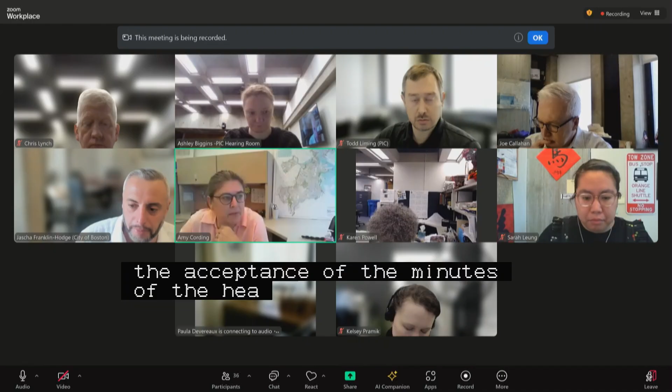So moved. On to our next item, public hearing continued, number 1, on a joint petition by the City of Boston Transportation Department and the City of Boston Public Works Department for the making of specific repairs within the following public ways in South Boston, consisting of curb realignment, roadway and sidewalk reconstruction, as well as new and relocated pedestrian ramps, traffic signal infrastructure, street lighting infrastructure, hydrants, driveway curb cuts, raised crosswalks, protected bicycle facilities, and median islands.

Old Colony Avenue, generally between Joseph Agri Street and Mitchell Street. Dorchester Street, generally between Tuckerman Street and Reverend Richard A. Burke Street. Mitchell Street, generally at Old Colony Avenue. This was new business on September 26th, with public hearings on October 10th and October 24th, as shown on a set of plans entitled City of Boston Public Works Department Engineering Division Specific Repair Plan, Old Colony Avenue and Dorchester Street, South Boston, 5 sheets dated November 6, 2024.

Would the proponents please introduce themselves, their affiliations, give us a very brief reintroduction to the project, and let us know about the changes we've all been awaiting.

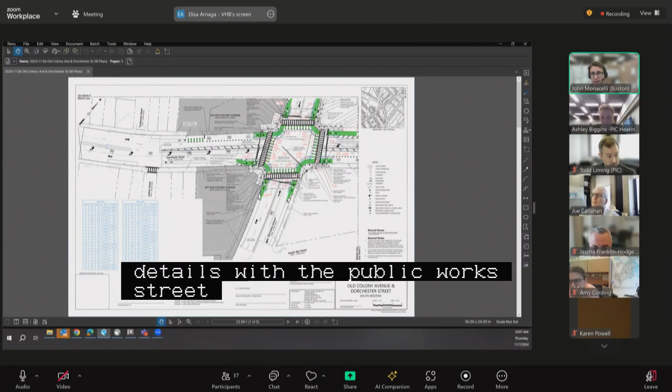Thank you, Commissioners. Good morning. John Monacelli with the Public Works Infrastructure and Design Team. I'm joined here by the consultants, Elisa is here from VHB. We did request the continuances to better coordinate with the development, specifically at 267 on that corner on the southwest of the page here. We did resolve the kind of who's doing what question, which was the biggest question mark for us. There is 1 or 2 small details with the Public Works street lighting teams to get their notes correct on these plans, and I think it relates mostly to dead-ending certain conduit runs so that there isn't live feeds while the development versus our work is happening. So we just have to get whatever the wording and the specs are from them for that. But overall, I think the biggest issues have been resolved here.

Sorry, general overview, apologies. This intersection here has a high history of crashes, mostly vehicle to vehicle, based on the multiple lanes of Old Colony and the connecting diagonal corridor of Dorchester Street. Oftentimes we have permissive left turns ending in vehicle to vehicle crashes, and subsequently jeopardizing the life and safety of non-vehicular users in the intersection as well. We have met with the community. We've been working with these developers on all 3.5 corners of the intersection, and it will support our projects moving forward on Dorchester Street specifically, and then hopefully in the future more up Old Colony as more developments trigger in. The majority of this work is to reconstruct the sidewalks, to relocate signal equipment and lighting, to improve accessibility and reclaim areas within the intersection to make those turns safer and more visible for folks.

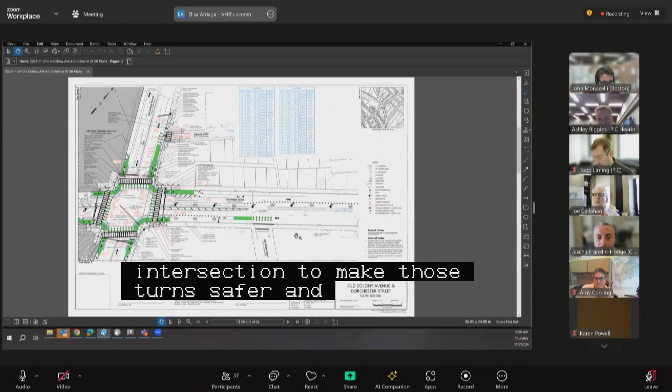Thank you very much, John. Commissioners, any questions? Hearing none, PIC staff or members of the public? We'll just ask that the street lighting comments be incorporated into the final Mylars before the project team submits those. Other than that, we have no concerns.

Seeing no raised hands for public comment, do I hear a motion to approve public hearing continued, number 1? I'll make a motion to approve a joint petition by the City of Boston Transportation Department and the City of Boston Public Works Department for the making of specific repairs in Old Colony Avenue, Dorchester Street, and Mitchell Street, as read into the record by the chair. Second. All in favor? Aye. Aye. Any opposed or abstain? So moved.

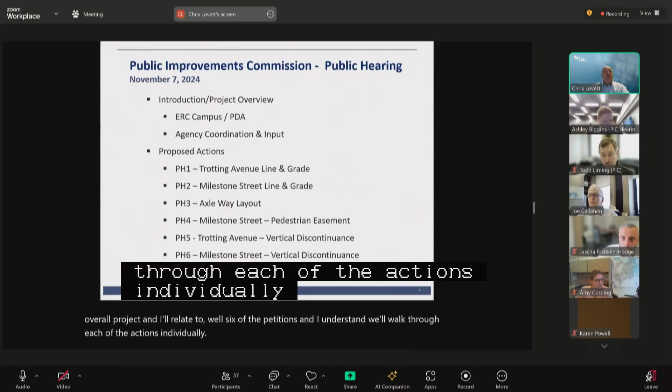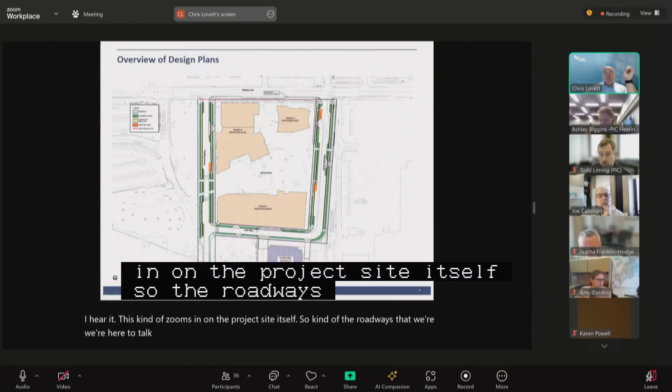Here, this kind of zooms in on the project site itself. So the roadways that we're here to talk about form this U around the development site. This development site was permitted through the PDA process by Tishman Speyer as a developer, but there's 3 buildings, a lab building, hotel and residence building, and the Harvard Conference Center as part of the project. And then there's a large greenway public open space that includes a shared use path and large walking areas and plazas.

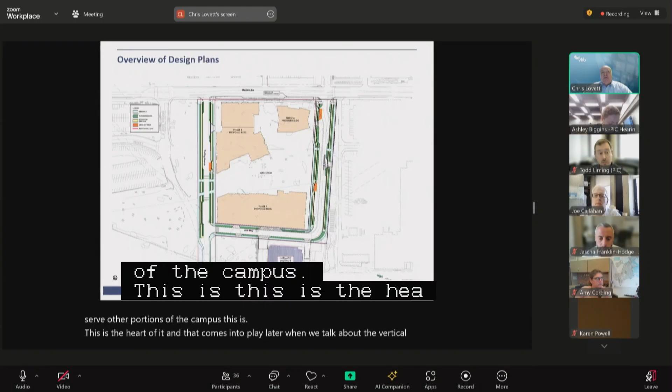And a key point on this is Harvard's district energy facility, which serves their holdings in Allston, the academic holdings. It includes the Science and Engineering Complex out to the west, the business school to the north, and there's multiple crossings of Western Ave and also crossings of North Harvard to serve other portions of the campus. But this is the heart of it, and that comes into play later when we talk about the vertical discontinuances and the amount of infrastructure and utilities running to and from this building to serve Harvard's campus.

Well, we have the big picture here. I just did want to point out a few things. The light blue on these are the sidewalks, so sidewalks on both sides of all these streets that we'll be talking to. The orange on these is either ADA drop-off areas or ADA parking spaces, and those will include an at-grade island, street level island, and then ramp up onto the sidewalks, providing better accommodations. This here on Trotting Ave is a raised crossing.

This will tie into the existing shared use path that runs west out through Rena Path in the park and then out to North Harvard Street. And then based on ongoing conversations we have with the project, this will be a raised crossing of Milestone as well. The shared use path will connect pedestrians, but also the northbound cycle track connection would be here.

As we talk through the plans, we'll also discuss modifications made here to create a perpendicular crossing as opposed to an apex ramp. We've made adjustments to make these ramps shallower, using a 3-inch transition instead of the typical 6 or 7-inch, so this will be a 4% ramp instead of an 8% ramp.

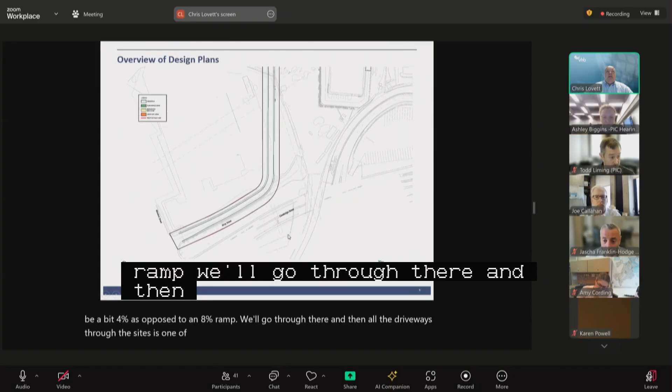Then all of the driveways through the sites - there's one at the hotel, one for access into parking for the lab and the whole site. The parking is underneath the buildings. This is loading for the lab, and this is loading for the conference center. All of those crossings will have a City of Boston driveway concrete apron, and all the pedestrian and bike crossings will be at grade.

Extending to the south, this piece here is interim Trotting Avenue. Long term, this will connect to Cambridge Street. In the short term, this will be maintained as a driveway that goes out to Windom Street, connecting into the existing Olney Street, and then following that connection out to Windom.

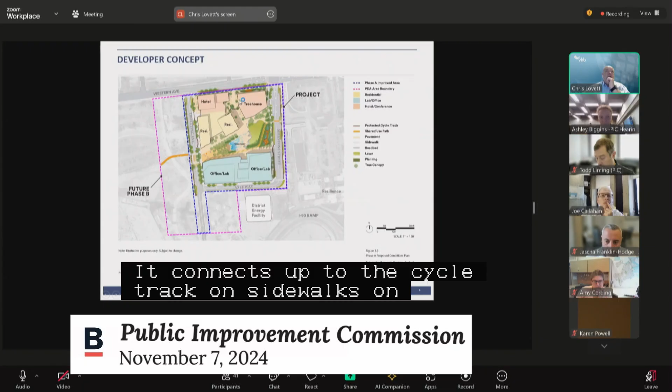This also shows that the conference center is pushed off the road a bit compared to the other buildings, and the office labs are set back a little as well.

I want to thank the Boston team through this process. It's been a long process, but a good one, and we've made changes to the plans along the way that I think have led to a better design and incorporated a lot of input that the city has had in advancing the project.

So we would like to jump into the actual petition now. The public hearing for petition 1 had opened, and this is for the line and grade approval for Trotting Avenue as a public way.

Again, we talked a little about this, but the roadway will have, on each side of the street, an 8-foot sidewalk and a 5-foot cycle track. In between, there will be hardscape areas, furnishing zones, and some bump-outs along the corridor to provide either planting or additional hardscape space.

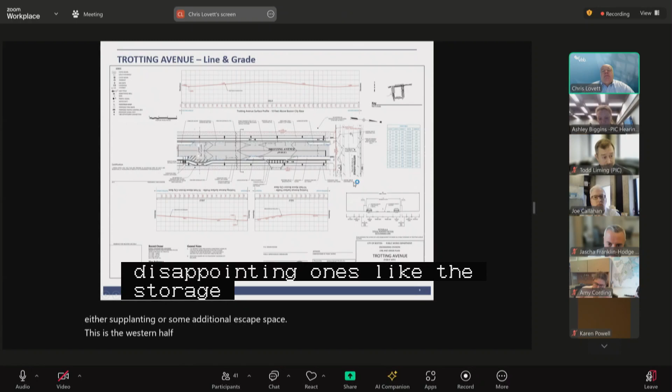This is the Western Ave connection. Western Ave improvements are part of the Tishman Speyer development project. They are actively working with the city now, and recently the 75% plans have been submitted. My understanding is their intention is to come before this board, this commission, once they have comments from the 75% plan review, and they're hoping that will happen within the next couple of months.

These show a coordination of the connection to Western Ave and the sidewalk-level cycle accommodations as well.

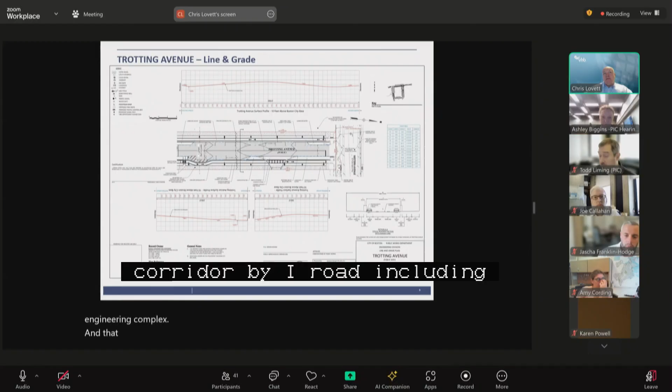This also shows the lighting. We've worked with the City of Boston Lighting Department. This is consistent with the overall Allston lighting plans carried through the Western Ave corridor by Harvard, including the Science and Engineering Complex, which includes a tighter spacing with a mix of higher and lower levels to focus on pedestrian-level lighting and make sure that's accommodating.

This here is the accessible drop-off spot. It aligns with the entry to the residential building on this corner, and the greenway sits here, providing good proximity to both the greenway and the residential building.

And then here you can see the start of the raised crossing, connecting out to the shared use path. This will be the future Science Drive longer term, but the bike shared use path will continue out to the west through the science complex and into Rita Path.

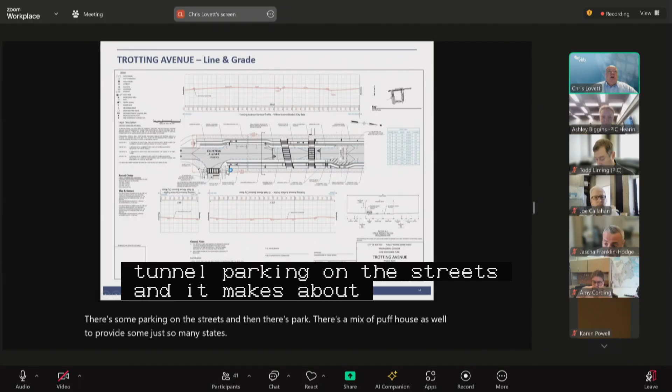And this brings us down. There's some parking on the streets, and then there's a mix of bump outs as well to provide some additional landscape.

This here is the crossing of Axel Way, and as I mentioned earlier, one of the things that were discussed was we had looked at trying to make an at-grade crossing for the sidewalks. There was some challenge, but we were able to make accommodations so that this is just a 4% drop transition through here.

Tying back in across to the south side of Axel. And then at the end here, there is room for fire apparatus to make this turn.

Axel Way is just to the east here, and we'll provide accommodation to circle through the ERC campus phase 1 roadways. As part of the process, we've established that we can do that turnaround just within the public right-of-way components of the project.

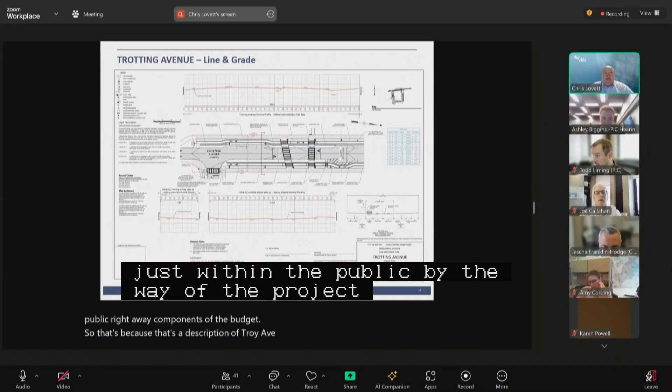So that's, I guess, a description of Trotting Ave, and I could turn it over to see if there are any questions or comments. Commissioners, questions?

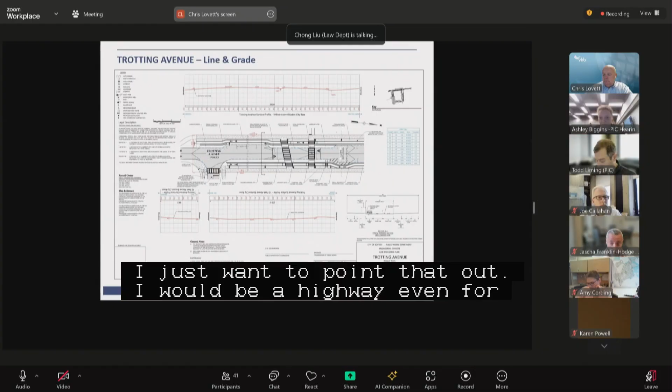I received a draft highway easement for both Trotting Ave and Milestone, which is the highway easement agreement, and the draft appears to be okay.

And I would say I have no other issues other than that PIC approves the easement drawing. So I just want to put that on the record.

I really appreciate Harvard legal counsel working with me over the last couple of days with a lot of phone calls, and I appreciate that. It appears the highway easement agreement is okay. Thank you.

All right, hearing nothing else. Todd, any final words on this one?

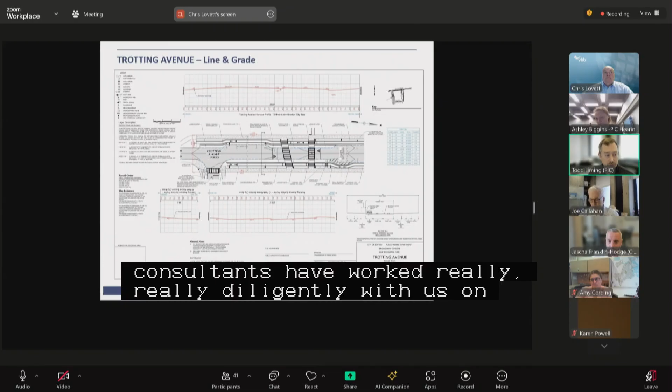No, the project team and their consultants have worked really, really diligently with us on this entire project, and it's been kind of a long road to get here. So it's worth mentioning, I just really appreciate all of the cooperation and coordination that they've gone through.

They've done a great job, but we're all set. All right, yeah, sharing that appreciation as well.

Do I hear a motion to approve public hearing number 1? I'll make a motion to approve a petition by the President and Fellows of Harvard College for the line and grade approval of Trotting Ave as read into the record by the chair.

Second. All in favor? Aye. Any opposed or abstain? So moved.

On to public hearing number 2, on a petition by the President and Fellows of Harvard College for the line and grade approval and the acceptance of a highway easement for a new public way in Brighton to be known as Milestone Street, located generally west of Soldiers Field Road from Western Avenue to a point approximately 647 feet southerly.

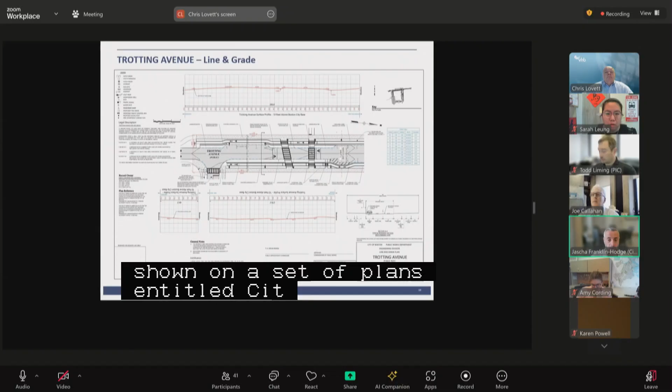This was new business on October 10th, as shown on a set of plans entitled City of Boston Public Works Department Engineering Division Line and Grade Plan, Milestone Street, Public Way, Allston, 4 sheets dated November 7th, 2024.

Would the proponents please reintroduce themselves and give us an overview of what is planned. Excuse me, we'll skip the overview since we have the high level, but please walk us through the specifics of this particular line and grade plan and any changes since your new business hearing.

Apologize, I'm going to stop the share and try to restart it. Okay, there.

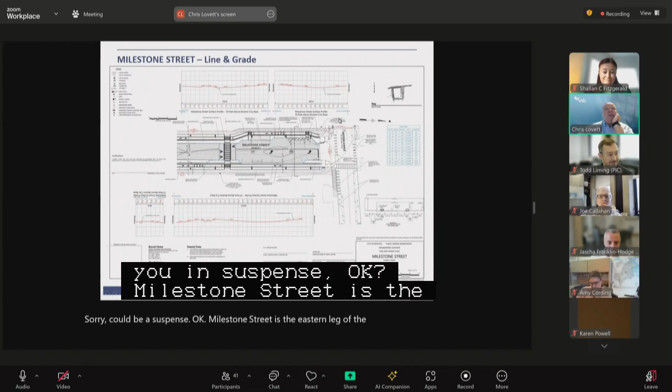Okay, Milestone Street is the eastern leg of the U. Similar conditions on Western Ave, working with the Tishman Speyer team, and they will be coming before the commission. But we've coordinated the intersection to align, including the

sidewalk level cycle track coming across the street here. On Milestone Street, the development is on the west side.

There is an ADA drop-off and an ADA parking space on this side adjacent to the conference center, the most public of the buildings. So there's connectivity to both the front and side entries of the building.

There's a small loading driveway here, again with the City of Boston concrete apron, with the sidewalk and cycle track staying at grade. Right here we have, in the initial phase, a shuttle pickup drop-off, but longer term, we plan for this to be accommodated.

This is designed to accommodate an MBTA bus stop as part of the design.

Since it's the ongoing conversations from new business and meetings in between, we've made accommodations to adjust the mid-block crossing. So again, this takes the shared use path across Milestone through the Greenway and across Milestone to the northbound cycle track and the sidewalks.

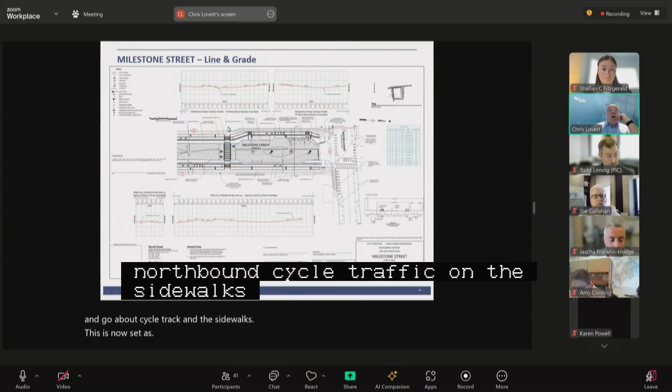This is now set as a raised crossing. So this is a 6-inch raised crossing that will accommodate this area.

Along the side, we have a 7.5-foot sidewalk that does require an easement because of the bus stop and accommodations. We have a petition for a sidewalk easement as well, but the sidewalk in total is 7.5 feet. The easement itself will be 5 feet, so 2.5 feet will be in the right of way. There are also plaza areas between this easement and the Treehouse Conference Center.

As you continue, I should also point out on Milestone Street that there is a new driveway proposed to connect into the NRI site, the former Genzyme site. Their existing access is through a driveway here, almost immediately adjacent to the proposed Milestone Street.

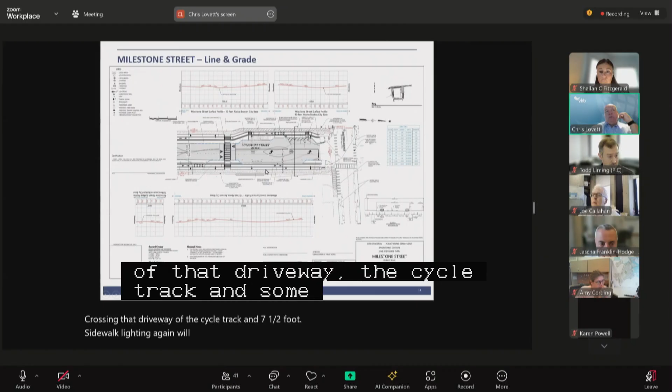So as part of the project and the West Ave Improvement Project that Tishman Speyer will be coming forward with, this curbing will be closed off and the driveway will be relocated south onto Milestone Street. Again, a raised crossing of that driveway, of the cycle track, and 7.5-foot sidewalk. Lighting will be a little tighter spacing than the typical Boston standard to accommodate more pedestrian-level lighting consistent with the Harvard Master Plan for Allston and previous projects.

And then further south on Milestone, this again is a drop-off. This is at the corner of the lab building and the south end of the Greenway. So again, good connectivity with the Greenway as well as the building, parking along Milestone.

And we've made a couple additional modifications in this new business as we've continued conversations with the city. So this has been modified. This was an apex crossing before. We've shifted it a little bit north and made it a perpendicular crossing to the south. And then we've also made some accommodations or additions in terms of pavement markings to continue this down to the driveway.

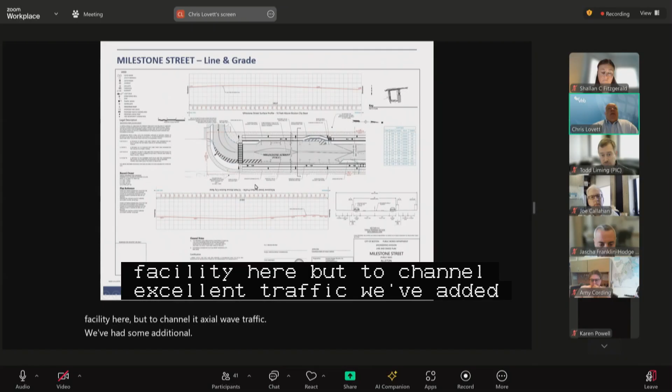This is the district energy facility here. To channel the Axle Way traffic, we've added some additional roadway striping in that area. So that is Milestone Street. And again, similar to Trotting, we will have a connection through Axle Way, a private way. We do have the ability to turn the fire apparatus within the Milestone right of way within the curbing.

Thank you very much, Chris. Do you have, so first of all, thank you for the adjustments here. I think this was very responsive to the comments we had at the last meeting, so I appreciate that.

One of the things that came up was sight lines going around this curve, and I appreciate that the team shared a sightline diagram with us. Would you be open to, if you have it handy, pulling that up so we can put that on the record and in the recording? Yes, let me figure out how to do that. If not, Todd, I think, has it handy and could pull it up. Let me just slide it over.

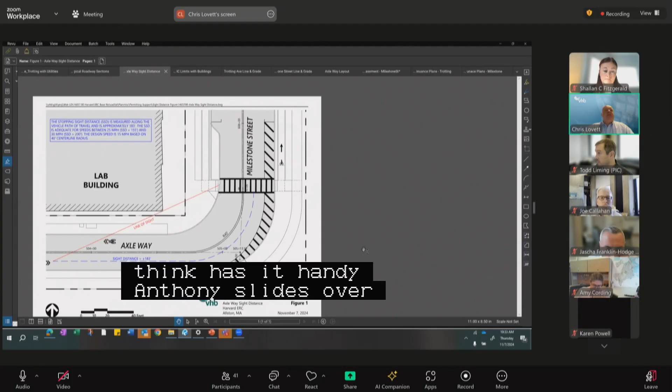So this is the sight distance diagram here. The lab building does sit back on this corner. There's an overhang about 25 feet up that will come out further, but that's outside of the sight line. So this provides about 183 feet of stopping distance through the line of sight to any pedestrian crossing. That line of sight distance would accommodate something in the range of 25 to 30 miles an hour, and this would be based on the roadway geometry and the 40-foot centerline radius, a 15-mile-an-hour speed zone design speed.

Excellent, thank you. And yeah, appreciate the clarification about the overhang. Just one question related to this while you have it up: if you look at this space that sits underneath the overhang and just outside of it, at the apex of that corner, are there any anticipated elements that would exist there on the sidewalk, fencing, structures that might impede those sightlines, or is it anticipated that that whole area will be left clear?

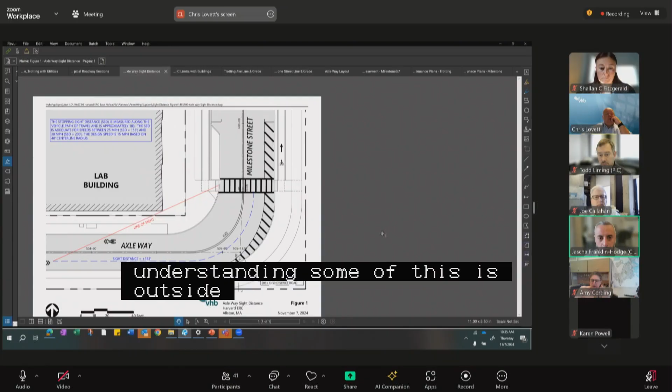It's anticipated to be left clear. We will definitely check that and make sure that no obstructions are placed within that distance. Yeah, that would be great to confirm. Understanding some of this is outside the public right of way, but obviously keeping that area clear is essential for the safe functioning of the public right of way. So we would appreciate clarity, a confirmation on that.

Commissioners, questions, comments?

All right, hearing none from PIC staff or members of the public. John Monticelli, go right ahead, sir.

Just a question, and this may or may not be available right now, but could we see the auto-turn swept paths for some of those more predictable vehicles? I appreciate you running through the sight distance and the design elements here, talking about the space that's hatched out for reservation for maneuverability. I am a little concerned about people cutting the corner, less so in larger vehicles, more so in the smaller ones. I'm thinking of areas of South Boston and industrial areas that are filling in and getting more activity and pedestrian traffic. I'm wondering if there's a way to keep folks on the side of the double yellow that they're supposed to be on.

I apologize, I don't have those turning templates handy, but we can definitely take a look at that and review it. Well, thank you so much.

Todd, anything else? I think we're all set. I know Chung was working with the project on the sidewalk easement for this one also, and they're in a similar place with that.

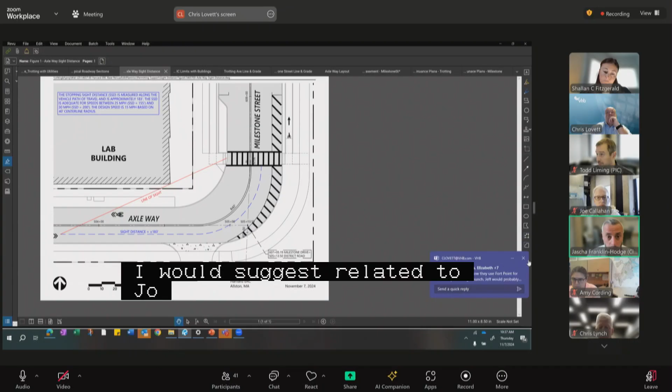So what I would suggest, related to John's comments, is that since any changes resulting from that review of the swept path analysis would likely be through traffic control devices or striping changes rather than physical permanent roadway design changes, we move ahead with this agenda item, but take it as a follow-up to sit with John to review those things. If any adjustments are made, the final plans would be updated to reflect those. Is that amenable to the proponents?

Yes. All right, excellent. Seeing no other comments or raised hands, do I hear a motion to approve public hearing number 2? I'll make a motion to approve a petition by President and Fellows of Harvard College for the line and grade approval of Milestone Street as read into the record by the chair, contingent on the result of the corner treatment through BTD. Second.

All in favor? Aye. Aye. Any opposed or abstain? So moved. On to public hearing number 3, on a petition by the President and Fellows of Harvard College for

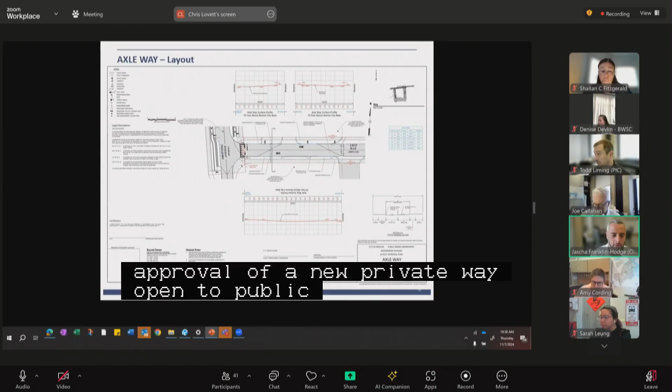the layout approval of a new private way open to public travel in Brighton, to be known as Axle Way, located between the southerly terminus of Trotting Avenue and the southerly terminus of Milestone Street. This was new business on October 10th, as shown on a set of plans entitled City of Boston Public Works Department Engineering Division Layout Approval Plan, Axle Way, Private Way Open to Public, Allston, 3 sheets dated November 7th, 2024. Would the proponents please reintroduce themselves, their affiliations, and walk us through any changes to these plans since your new business hearing?

Chris Sullivan again with BHB. Axle Way is intended to be laid out as a private way connecting Trotting Ave and Milestone Street. Axle Way is more of a service road for the ERC, the east-west roads, but it does connect to and serves the parking access for parking underneath the Phase 1 buildings. There's also loading on the north side for the lab buildings, and on the south side there are driveways around the distributed energy facility.

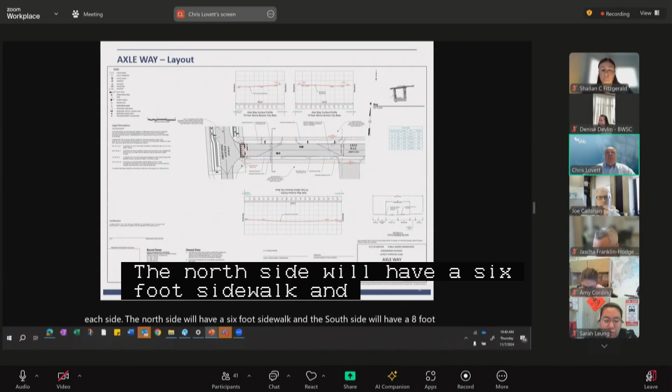And that's Axle Way. Thank you very much. Commissioners, questions, comments?

Seeing none, PIC staff or members of the public? I see none. All right, do I hear a motion to approve public hearing number 3?

I'll make a motion to approve a petition by the President and Fellows of Harvard College for the layout and approval of Axle Way as read into the record by the chair. Second. All in favor? Aye. Aye. Aye. Aye. Any opposed or abstain? So moved.

On to public hearing number 4, on a petition by the President and Fellows of Harvard College for the acceptance of a pedestrian easement adjacent to Milestone Street, public way, Brighton, located on its westerly side south of Western Avenue. This was new business on October 10th, as shown on a plan entitled City of Boston Public Works Department Engineering Division Pedestrian Easement Plan, Milestone Street, Allston, one sheet dated August 2024.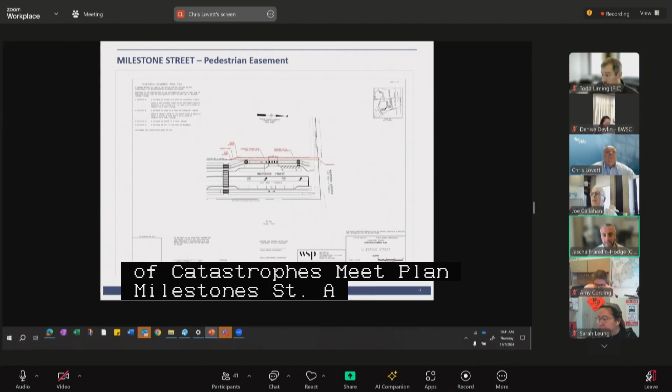Would the proponents please reintroduce themselves and give us any updates on this proposal since your new business hearing? Chris Lovett with VHB on behalf of Harvard-Allston Land Company. There have been no changes with the pedestrian easement. This remains a proposed 5.5-foot wide easement, and that combined with the sidewalk within the right-of-way will be a 7.5-foot sidewalk, and then behind this is also plaza area, offset from the Treehouse building, Conference Center building.

Commissioners, questions, comments? All right. PIC staff, members of the public? I believe Chong has commentary on this.

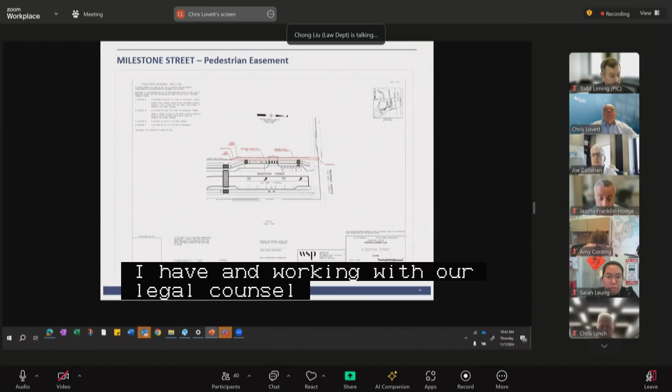Yeah, hi. My name is Chong Liu, and I'm the legal counsel for the Public Improvement Commission. I have been working with Harvard and its legal counsel to finalize the pedestrian easement. I have no major concerns about that, and thank you.

All right. Todd, any other comments? No, I think we're all set on this. Thank you. All right. Do I hear a motion to approve public hearing number 4?

Make a motion to approve a petition by the President and Fellows of Harvard College for the acceptance of a pedestrian easement in Milestone Street as read into the record by the chair. Second. All in favor? Aye. Aye. Any opposed or abstain? So moved.

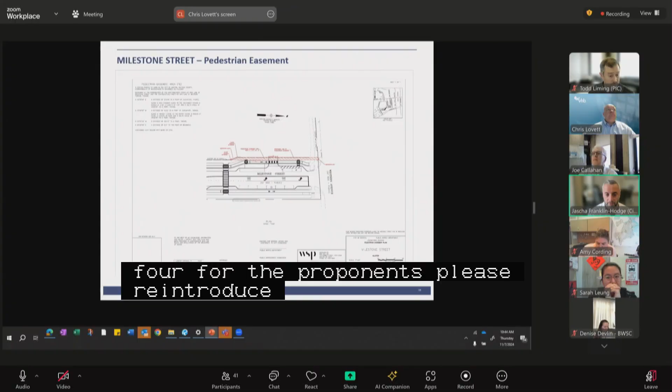Would the proponents please reintroduce themselves and give us an update on the vertical discontinuance that was first discussed at the new business hearing, and also provide a reminder for the record on why we are considering vertical discontinuances in this newly approved public way. Chris Lovett with VHB on behalf of Harvard-Allston Land Company.

This proposed vertical discontinuance—at the beginning of the project introduction, we had pointed out the location of Harvard's district energy facilities serving their Allston Holdings on the southern end of the project site. That building, that facility has a lot of infrastructure coming out of it: chill water supply and return, hot water supply and return, communications, and electrical, primary electrical feeds going out to the buildings, the different campuses within Allston serving the site.

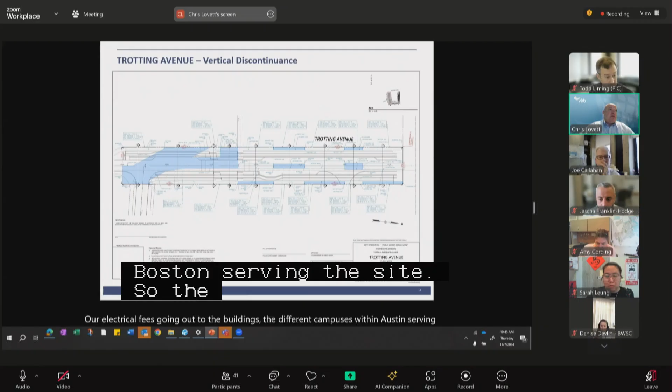So there's a large amount of Harvard private infrastructure serving their properties, and there's the business school across the street, but in particular the science and engineering complex and ongoing studies and research there—the need to keep those buildings active means all of these utilities are important in terms of maintaining resiliency and reliability. So the proposal for the vertical discontinuances is to protect those utilities and corridors and maintain that service to those buildings, and also provide access to those utilities.

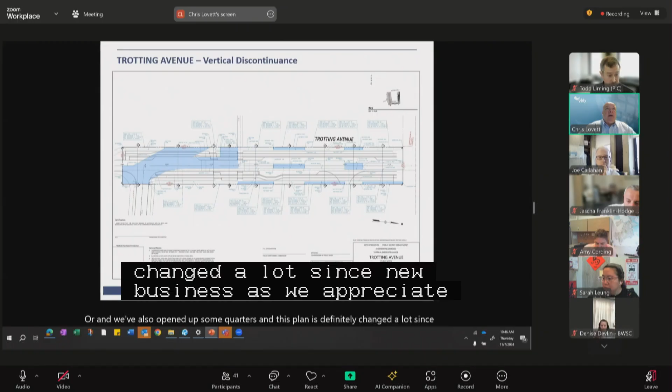And then we work with the city around where needed, easements across it, and we've also opened up some corridors. This plan has definitely changed a lot since new business, and we appreciate the efforts working with the city to develop a plan that can document the limits of it, and also provide open areas for the city as well.

So when we came before this group last time, in particular this area I think was all blue—this is the future Science Drive. There's infrastructure that runs all the way out here. This is where the Science and Engineering Complex runs out, and this runs out to the Science and Engineering Complex. And there's future stuff out here as well. So all of that area south of Science Drive had been blue.

We've worked with the city and with Harvard to try to carve out some additional areas for that. I do want to point out that the solid blue shows up very well on this. In between each of these solid blues is a striped area as well, and what these represent are different elevations with the top of the vertical discontinuance.

The bottom remains -100 for all of them, but the top varies so that we make sure we're below the roadway grades, with a little bit of cushion below the roadway grades, but not too deep that we're getting into the utility. So we're trying to work with both the longitudinal grades of the road and the crown of the road.

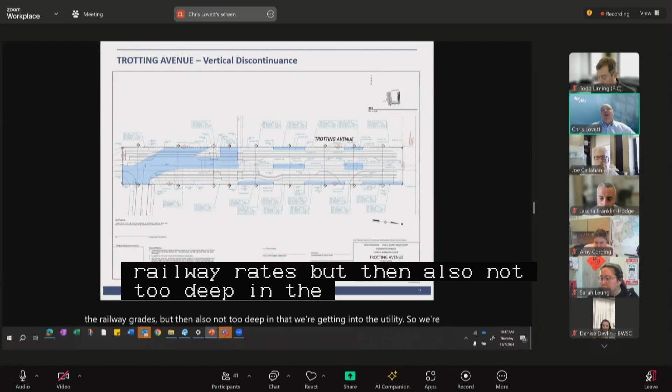It does lead to us opening up, breaking it into many segments to effectively capture the volume of the vertical discontinuance.

In working with the city, we've also added sections to the plans. The blue would indicate where Harvard is requesting the vertical discontinuance, and the white areas within the right-of-way would be the areas that remain open.

This is in addition to what was presented at new business, and also provides additional corridors for the city to work through this and provide opportunity for future utilities. So that is the vertical discontinuance for Trotting Avenue.

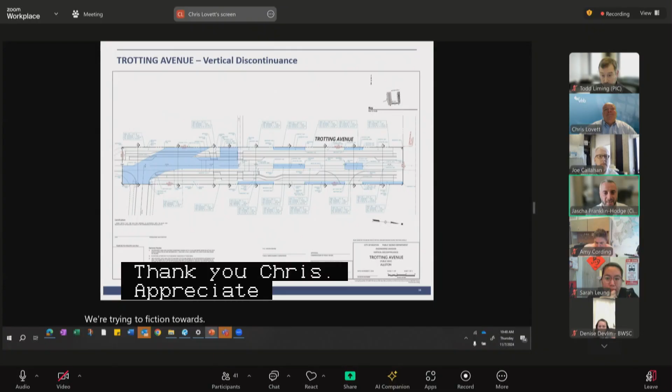Thank you, Chris. Appreciate that walkthrough. Yes, this has been probably the most complex and challenging part of this project relating to the development of this plan, so I appreciate the work that's gone into it, and the dialogue that's happened with the city team on this.

Commissioners, questions, comments? Oh yes, I have a few comments. Thank you. So we ask that PIC doesn't record the vertical discontinuance until Public Utility BWSC obtains a satisfactory easement for pipes within the Harvard easement.

Because we have, in the blue areas shown on the map, what we did was use our own map, and there are definitely some overlaps with BWSC utilities and the vertical discontinuance areas.

We have a slide later that lets us speak to the legal status of agreements, and we're noting that Harvard has drafted and will finalize an easement with the Boston Water and Sewer in coordination with PIC for Boston Water and Sewer Commission's infrastructure that runs through areas of vertical discontinuance. Okay, thank you.

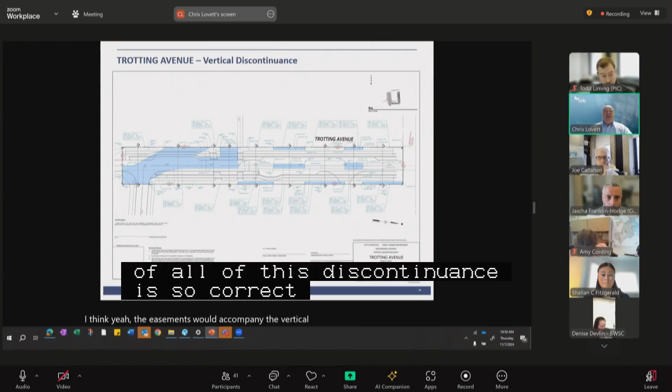And we expect that easement to be completed as part of the filing of all of these discontinuances, is that correct? Yeah, I think the easements would accompany the vertical discontinuances, which would accompany the petition for the city to accept the roads. Got it.

All right, commissioners, other questions, comments? So I will just make one for the record comment. This is a very unusual situation, and one that I think from the perspective of the city is a condition that we generally would seek to avoid as an outcome when creating a new public way.

We believe that having public ways that are, above and below ground, generally public, is an essential aspect of the city being able to manage both the roadways, the flow of traffic and pedestrians on those streets, but also to be able to provide areas that can serve the public interest broadly in terms of utility access or other elements that may need to go underground.

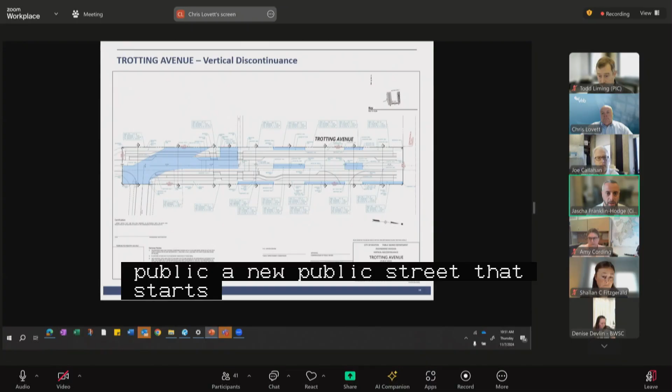As you know, creating a new public street that starts on day one with significant discontinuance underground impairs our ability to do that. I think we have made, as a city, a decision to allow this in the case of this project, given the unique circumstances associated with the district energy facility, given the very unique condition in which substantial utility infrastructure was built prior to the layout of the public way, and with some changes over the years in expectations about what might be public, what might be private.

I've heard different versions of that history, but certainly I think there was a belief on the part of some folks within the proponent team that when this original infrastructure was laid out, it would be sitting under a private way and therefore not subject to this whole process of discontinuance.

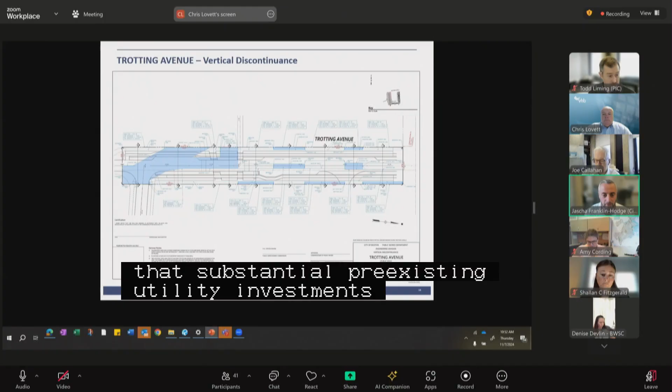So, without diving too deep into the history, the thing that is important for me to note here is that this is not a precedent for future projects. This is us working to make the best of a very unusual set of circumstances to ensure that a new street can be created, that substantial pre-existing utility investments by the proponents can be protected, and that we strike a reasonable balance to preserve the maximum utility of this public way for the city and the residents we represent for many years to come.

We certainly do not anticipate that any future public ways that are laid out will have this; it will certainly not be common practice to approve substantial predefined utility discontinuances, and in general we take the position as a city that public ways should be public above and below ground, except in a very limited set of circumstances where we grant rights to utilities to occupy relatively defined and small spaces within those rights of way. So that's my for the record spiel. We are not looking to replicate this condition in the future in other places.

With that, Todd, PIC staff, members of the public, anyone else like to add anything?

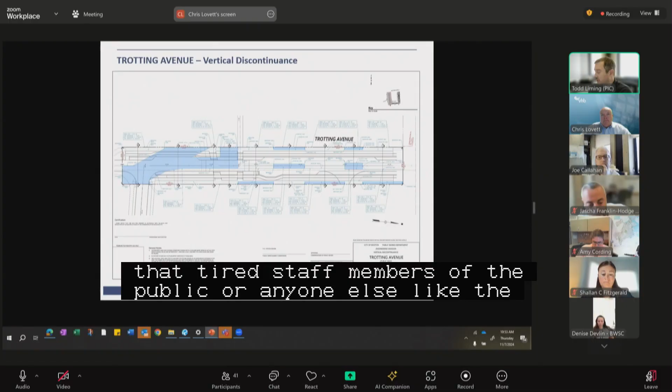I will just mention, due to the complexity of these vertical discontinuance plans, there is some refinement that the project needs to go through, adding metes and bounds descriptions and stuff like that, which maybe wasn't the most critical thing to show on these plans for this presentation, but does need to be part of what is reported eventually. Because of that, these plans are not necessarily final, and the number of sheets and the titles might be slightly updated prior to recording. Just for the record, that's something to keep in mind.

With the update based on our conversations, we did add the metes and bounds on the line work, but we do need to add the legal description per our discussion. So we'll be providing a legal description for each of the components. Yep, I know you're working on that, and I'll work with you to get those finalized before you run your final mylars. Excellent, thank you. It can be a lot of text.

All right, with that, do I hear a motion to approve public hearing number 6?

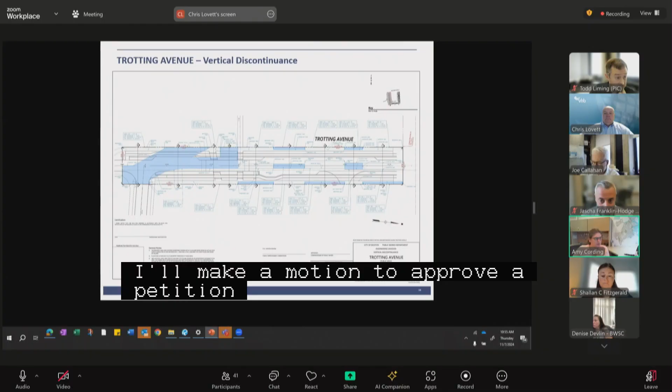I'll make a motion to approve a petition by the president and fellows of Harvard College for the vertical discontinuance of portions of Trotting Ave, as read into the record by the chair. Second. All in favor? Aye. Any opposed or abstain? So moved.

On to public hearing number 6. I may have misread that. I read the right one, you said the right number. Thank you. All right.

On to actual public hearing number 6, on a petition by the president and fellows of Harvard College for the vertical discontinuance of portions of Milestone Street, public way, Allston, located generally between Western Avenue and Axel Way, vertically beneath the grades of the roadways and sidewalks. This was new business on October 10th, as shown on a set of plans entitled City of Boston Public Works Department Engineering Division Vertical Discontinuance, Milestone Street, Public Way, Allston, 5 sheets dated November 7th, 2024.

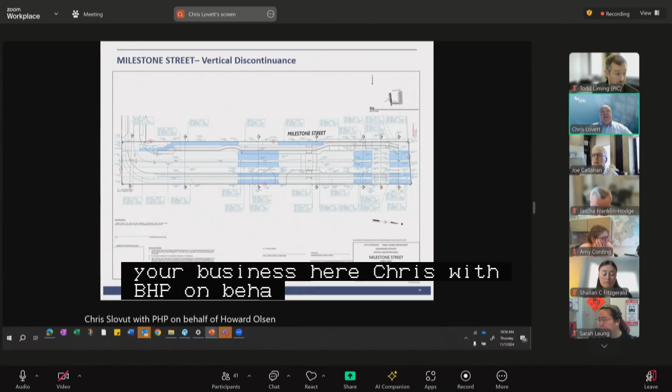Petitioners, please reintroduce yourselves and your affiliations and walk us through the details and changes since your new business hearing. Chris Lovett with VHB on behalf of Harvard Allston Land Company. This is a petition for a vertical discontinuance on Milestone Street.

As discussed in the project overview, Milestone Street is one of the utility corridors for the district energy facility that sits just south of this site. There are existing utilities running through this corridor and actually underneath Western Ave, where there already is a vertical discontinuance connecting into the business school.

Again, this plan has changed a lot since new business, working closely with PIC, and we very much appreciate the patience going through the process. We've broken this up into a number of segments, making sure that—there's some hatching that may not show great on this slide, but between the solid blue pieces, each of these are segments with the vertical delineation that is underneath the level of the pavement but over the utilities, and those are the discontinuance areas.

So there are a number of them for this particular stretch of Milestone Street. It does include the challenge of some services that come off the main lines that go up to the treehouse, as well as this site out here, where we make vertical accommodations to allow for passage over it within the corridors, particularly of the lighting and the drainage.

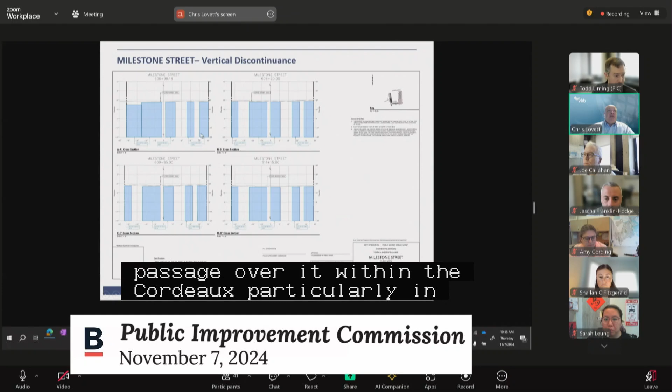So these are typical sections across each of those breakouts. There are areas where we drop it lower, for instance, for city lighting, and then there are corridors in between. Some of that is Boston Water and Sewer utilities, which currently have easements, which will go away when the roads are accepted by the city. But we will continue to work with the city to make sure this corridor is for the infrastructure.

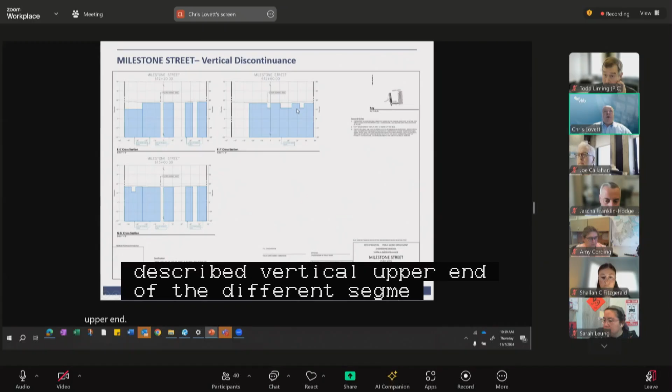This represents the kind of funky areas where we do have those service connections, so we have cutouts to allow for city infrastructure to go above these, and these go down at least 6 feet. As part of the ongoing comments, these will be broken up to provide separate areas in order to allow us to better and more clearly describe the vertical upper end of the different segments. So instead of this being one section, this is actually multiple sections through here, and that'll be updated on the plan with these sections.

Thank you very much. Commissioners, questions, comments?

I just had a comment, but I want to say thank you for responding to the comments from the last petition. We want to state for the record again, since it's a different petition, that we don't want the vertical discontinuance recorded until the public utility BWSC obtains a satisfactory easement for pipes within Harvard easement, where there's some overlap between the vertical discontinuance and our facilities. Thank you.

Thank you very much. I won't repeat my spiel, but I will again, for the record, say that this is an exceptional set of circumstances leading to us creating a set of vertical discontinuances on a newly created public way, and not one that we wish or expect to repeat in future projects, per my comments in the previous agenda item.

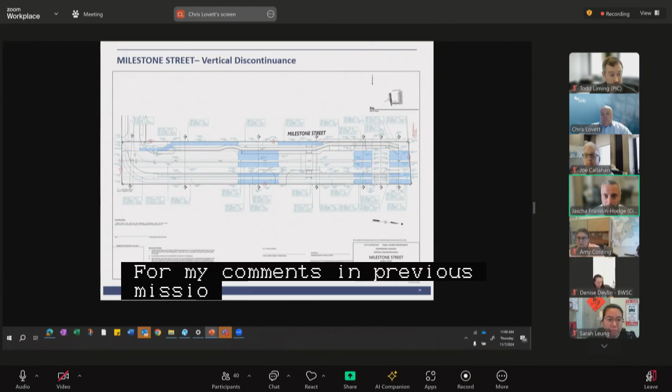Commissioners, any other comments? PIC staff or members of the public? I'll just mention the same point about the plans and descriptions — everything may be tweaked once finalized.

All right, hearing nothing else, do I hear a motion to approve actual public hearing number 6? I'll make a motion to approve a petition by the President and Fellows of Harvard College for the vertical discontinuance in portions of Milestone Street as read into the record by the chair. Second. All in favor? Aye. Aye. Any opposed or abstain? All right, so moved. We got it done.

Thank you all again from the Harvard team for working through all of these, some very challenging issues with us over the course of a number of years. So appreciate the work and the dialogue, and glad that we're able to move this ahead.

Thank you, Chief. I'd like to take this moment to thank Chair Franklin Hodge, members of the commission, the city departments, Chief Engineer Todd Liming, who was critical to us getting these plans in a position for the PIC to be able to review and approve, PIC legal counsel Chong Liu, who was also critical to us working towards making sure that all of the easements and agreements are in a good place, Boston Water and Sewer Chief Engineer John Sullivan, our stellar design team led by Chris Lovett and VHB, our council, our internal stakeholders who contributed many hours to this process.

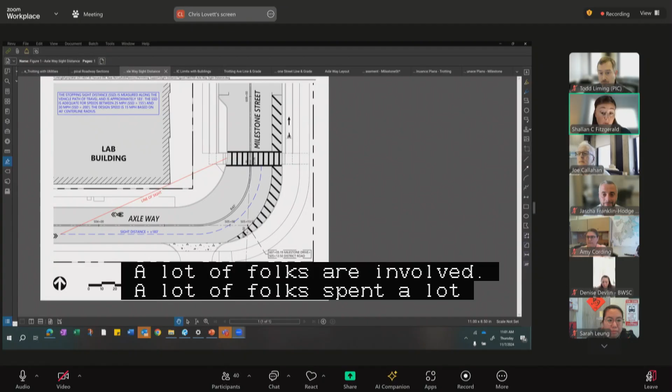A lot of folks were involved, a lot of folks spent a lot of time trying to make sure we were getting this right. So I wanted to take time to thank those folks, and we look forward to continued collaboration with the PIC for all of the future phases for Harvard's Enterprise Research Campus.

Thank you. Thank you, Shallan, very much. I appreciate the acknowledgement and the work that you put in as well to make this happen. So much appreciated.

All right, moving on to public hearing number 7, on a petition by the Trustees of Boston University for the making of specific repairs within Commonwealth Avenue, public way, Boston proper, located on its southerly side at address number 700, generally across from Granby Street, consisting of curb realignment, sidewalk reconstruction with structural soil, as well as new and relocated pedestrian ramps, specialty pavement, street lighting infrastructure, street trees, planters, landscaping, storm drain infrastructure, bike racks, and raised crosswalks.

This was new business on October 24th, as shown on a set of plans entitled City of Boston Public Works Department Engineering Division Specific Repairs Plan, 700 Commonwealth Avenue, Public Way, Boston proper, 6 sheets dated August 2024. Would the proponents please introduce themselves, their affiliations, give us a very brief reintroduction to the project, and let us know about any changes since your new business hearing.

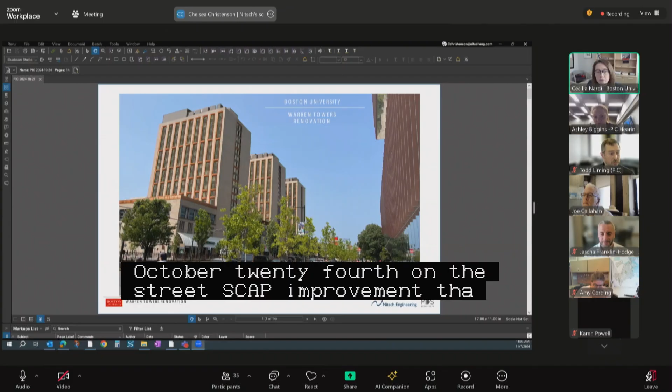Good morning, members of the commission. My name is Cecilia Nardi, and I'm the Director of Community Relations for Boston University Government and Community Affairs. We're here today to continue the presentation from October 24th on the streetscape improvements that will accompany our renovation of Warren Towers at 700 Commonwealth Avenue. These improvements will continue BU's long-standing tradition of working collaboratively with the City of Boston to enhance public spaces and the streetscape along key corridors.

A quick description of the project: constructed in 1965, Warren Towers is the largest dormitory in Boston and the second largest non-military dormitory in the US, housing 1,800 undergraduate students. The project site borders Commonwealth Avenue to the north, Cummington Mall to the south and west, and Hinsdale Mall to the east. The 18-story structure features 3 residential towers atop a 4-story podium, which includes student spaces, retail storefronts, and a parking garage.

The proposed streetscape improvements will elevate both the campus environment and the public realm along this prominent corridor. We'd like to thank all city staff for their thoughtful review and valuable comments throughout this process, and appreciate your time today. I'll now turn it over to Chelsea Christenson of Nitsch Engineering.

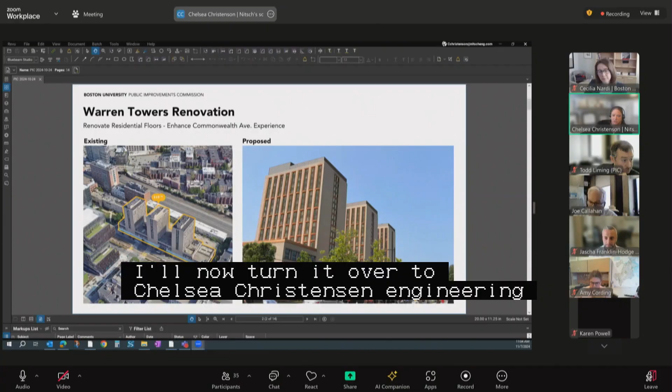Just for context, I have Warren Tower site here highlighted in red with the BU Bridge to the left, Mass Ave Bridge to the right. Thank you, Cecilia, for the introduction. Our specific repairs today include a new raised crossing at Cummington Mall and Hinsdale Mall with extended planters, new porous paver strip, approximately a 12-foot wide concrete sidewalk along the length of Warren Towers, as well as new bike racks, relocated street lighting, and new pedestrian ramps.

I did send out the updated plans to everyone. There have not been any changes since new business, but these are the specific repair plans that we have all seen. The raised crossing here at Cummington Mall, 12-foot wide pedestrian ramp with the straightened crosswalks going across Commonwealth Avenue.

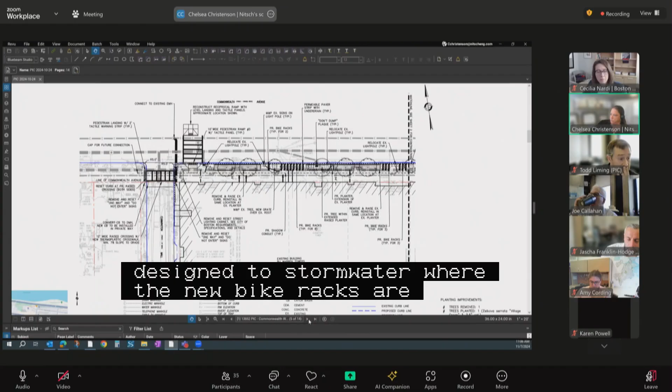Reset planters designed to accept stormwater where they can. New bike racks along the porous paver strip. Resetting the streetlights outside of the porous paver strip as requested. And

We also are relocating the bus stop that is currently located at this area here, down further to the east of Com Ave, which is the expected location of it.

With that, I will open it up to any additional questions that we may have. Commissioners, questions, comments? I'm not sure. All right, hearing none, PIC staff or members of the public? I think we're all set on this.

All right. Do I hear a motion to approve public hearing number 7? I'll make a motion to approve a petition by the trustees of Boston University for the making of specific repairs within Commonwealth Avenue as read into the record by the chair. Second. All in favor? Aye. Aye. Aye. Any opposed or abstained? So moved. Thank you very much. Thank you. Thank you all.

Thank you. All right, on to public hearing number 8 on a petition by residences at 1471 Blue Hill Limited Partnership for the making of specific repairs within the following public ways in Dorchester, consisting of curb realignment, sidewalk reconstruction, as well as new and relocated pedestrian ramps, specialty pavement, street lighting infrastructure, street trees, planters, landscaping, green stormwater infrastructure, bike racks, and driveway curb cuts. Blue Hill Avenue at address number 1471, generally north of Woodhaven Street, Culbert Street northwest of Woodhaven Street, Woodhaven Street generally at Blue Hill Avenue / Culbert Street.

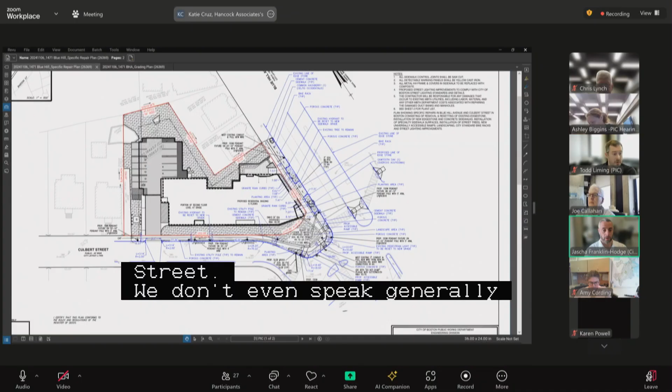This was new business on October 24th as shown on a set of plans entitled City of Boston Public Works Department Engineering Division Specific Repair Plan 1471 Blue Hill Avenue, Culbert Street, Mattapan, 2 sheets dated March 22nd, 2024, revised November 2024. The proponents please introduce themselves, their affiliations, give us a brief orientation to the project, and let us know about any changes since your new business hearing.

Good morning. I'm Katie Cruz, civil engineer with Hancock Associates, here with Scott Shaw of the proponent Lincoln Avenue Capital. The proposed project is located at the corner of Culbert Street and Blue Hill Avenue. It's also adjacent to Woodhaven Street. The project is 41 affordable housing units. The project site will include 12 parking spaces and a curb cut off of Culbert Street.

Since we last presented, we made some adjustments to the alignment of the 3 curb ramps at the corner of Blue Hill Avenue, Culbert Street, and Woodhaven Street so that they are aligned with the existing crosswalks. That adjusted the curb line a little bit to accommodate for that. We also modified the material between the curb ramps per the request of the Disabilities Commission - we've switched that to porous concrete. Other than some minor layout adjustments to accommodate the new curb line, the plans have not changed.

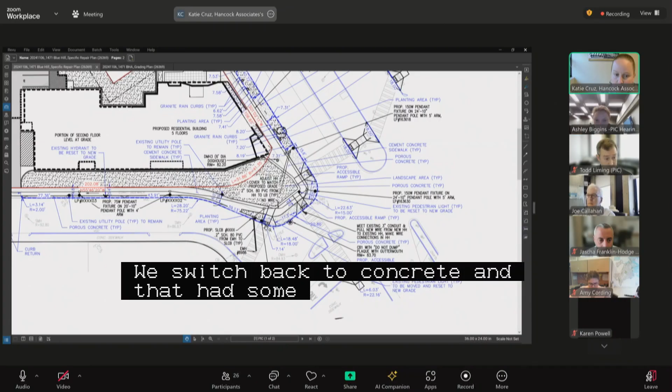All right, thank you very much. Commissioners, comments, questions? I just wanted to thank the team for incorporating our feedback about the furnishing zone and making that a more porous material. I did have a question about the width of the driveway and whether or not that could be narrowed due to the small amount of parking spaces that exist on site. In the future that could be narrowed down to 12 or 10 feet with approval from the Transportation Department.

Yes, Sarah, we did look at reducing the width of that driveway, and we elected not to for a couple of reasons. One is that we do need that width of the aisle behind the parking spaces for cars to maneuver in and out of those spaces. And then the other is that we have a loading area on the side of that driveway, and just to be able to accommodate that in two-way traffic, we felt like we needed that width of 20 feet.

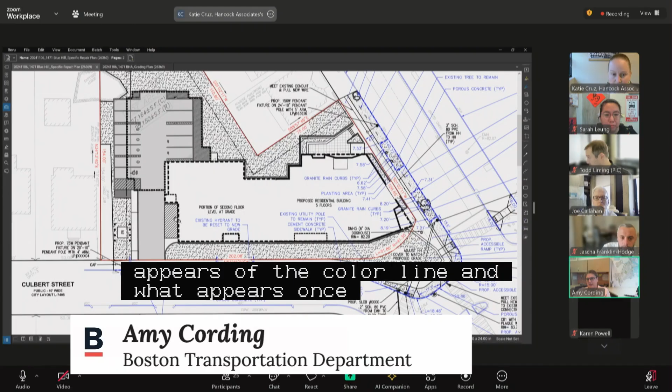Right, thank you. I guess I would just defer to Amy on that. Yeah, I think the question is, hearing the internal needs, what appears at the curb line and what appears once you're at the back of the sidewalk. If you leave the 20 feet and the things that are all in gray, can we just reduce the size of the curb cut and the pedestrian exposure to vehicles coming out of this driveway?

Understood. I think because this is a very small scale site, a small scale project, to allow for moving trucks to pull in there, as well as trash removal vehicles, having that 20-foot width makes that maneuver a lot easier to accommodate that use right off the curb cut. But we do appreciate that comment.

Was this dimension selected based on truck turning movements? Yes, it was. Great, then can you please supply those as backup for this? Yes, we can.

All right. Commissioners, other questions? PIC staff or members of the public?

I will mention that the project has gone through quite a few conversations with us specific to the pedestrian ramps and crosswalk alignments and all of that. We met with infrastructure and design consultants a few days ago regarding the crosswalks and ramps specifically. They've worked on it a lot. I don't know if any of the commission members have commentary they'd like to add regarding all of that, but thought it was worth mentioning.

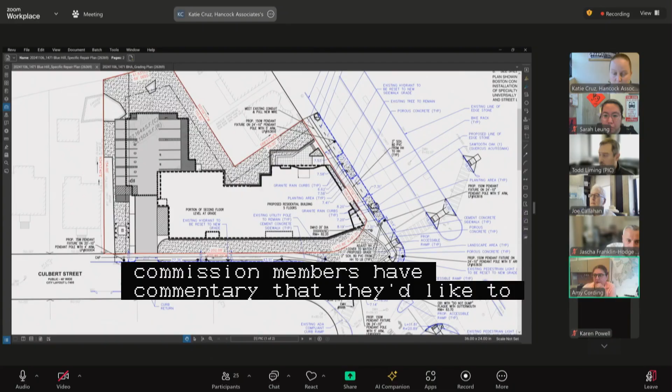No, I think the only thing I'll flag, and Todd flagged this everywhere, is that we have some other stuff happening on Blue Hill Ave, and we need to make sure that the timing and what shows up when is all well coordinated with that effort. So I know we're going to approve this, but we just want to make sure you're constantly a part of the ongoing Blue Hill Ave discussion.

Okay, I think there's a little bit of minor discussion regarding some of the ramps and the crosswalk alignment on the opposite side of Blue Hill Ave. The project team, I'm happy to continue that conversation with you, and we can tweak what's shown on these plans based on that conversation after this hearing, if that's all right with the commission.

Yep. Is that good with everyone? Concerns?

Yeah, and I'd also like to extend my appreciation for the changes that we do see here. I think aligning or resetting the curb, this is a much better shape, and the crosswalks and their ramps are looking much better in general. So just thank you to the team for your responsiveness on that.

And I'll just second Todd's comment that the far side ramp that goes from the median to the other side of Blue Hill Ave still has a weird alignment, but that's a relatively minor thing at this point. This is much improved. Indeed, thank you for that.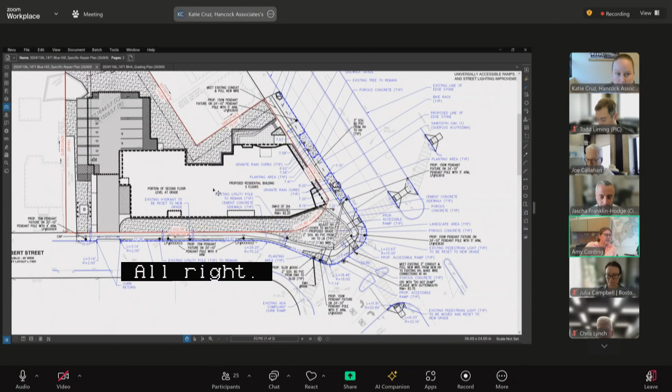All right, hearing nothing else, do I hear a motion to approve public hearing number 8? I'll make a motion to approve a petition by residences at 1471 Blue Hill Limited Partnership for the making of specific repairs in Blue Hill Ave, Culver Street, and Woodhaven Street as read into the record by the chair.

Second. All in favor? Aye. Aye. Aye. Any opposed or abstain? So moved. Thank you very much.

Thank you. Right, that concludes the public hearing section of the agenda, and on to new business, and possibly the most fun agenda item on our list today. We have new business 1, Washington Street, Winter Street, Summer Street, Franklin Street, Boston proper, specific repairs on a petition by Downtown Boston Business Improvement District. The proponents, please introduce yourselves, your affiliations, and talk to us about what you are proposing to put in Downtown Crossing.

Sure, thank you, Chief. Good morning, and thank you, Mr. Chairman, members of the Commission. I'm Michael Nichols, President of the Downtown BID, and on behalf of my colleague Kelsey Pramik and I, we're delighted to be with you today to share plans for a new set of distinctive holiday decorations for the shopping district in Downtown Crossing.

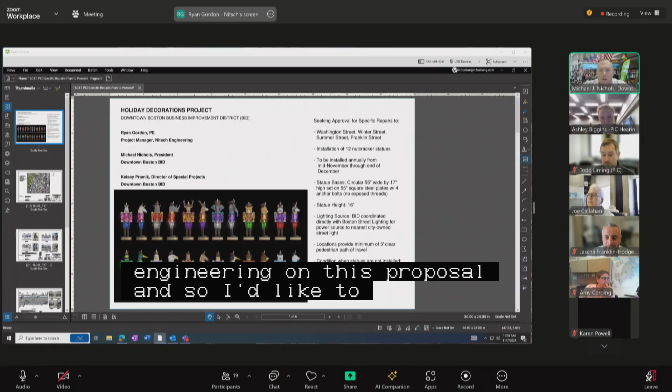Good morning to the Commission and everyone. My name is Ryan Gordon, Project Manager with Nitsch Engineering. As Michael said, we are proposing specific repairs to Washington Street, Winter Street, Summer Street, and Franklin Street for the installation of 12 statues. They are to be installed annually from mid-November through the end of December.

The statue bases are 55 inches wide by 17 inches high, set on steel plates with 4 anchor bolts. Each statue is about 16 feet tall, and the BID has been coordinating directly with Boston Street Lighting for power sources to each statue, to City of Boston Street Lights. The locations we are proposing provide a minimum of 5 feet clear pedestrian path of travel, and when the statues are not installed, there will be flat-headed anchors installed where the bolts are, so that flush sidewalk conditions are provided. So I'm going to walk through each location, and if you have any questions, please let me know.

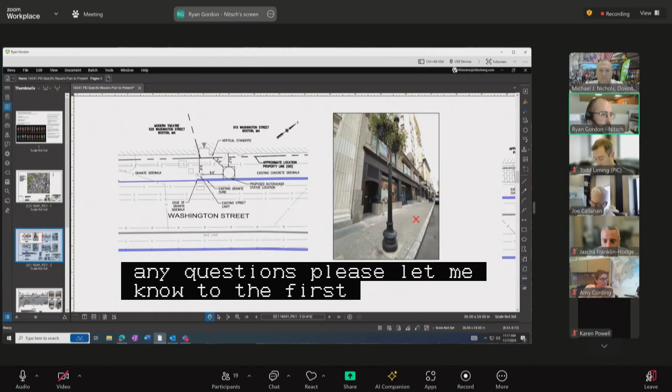The first location is next to the Modern Theater, 525 Washington Street. We have an X at each location that shows the approximate location. Each statue is set about 5 to 10 feet off of the nearest light pole. The second location is at 500 Washington Street, outside of the Winder Museum.

The third location is at 449 to 467 Washington Street, outside of the old Forever 21 and Snipes. We are using the furnishing zone as much as possible to get that statue base to not get into the pedestrian path of travel. The fourth location is on Winter Street, and Winter Street here is mainly open for pedestrian travel. The curb is flush, and most of the street is brick.

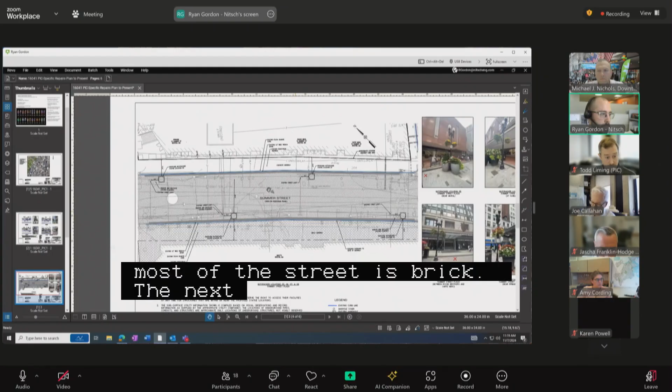The next 4 locations are spaced throughout Summer Street Plaza. You can see the 4 here. The next location is outside of 399 Washington Street, that's across from Old Navy. The next two are in Shoppers Plaza, and they're spaced apart, still providing that minimum 5 feet around. And the last location is outside of 343 Washington Street.

Just to show you again, here's an image of each of the statues, front facing and profile view. Our specific repairs plan has a detail of the base, the anchor bolt, and a rough detail of the minimum 5-foot path of travel. So I'm happy to answer any questions that you have.

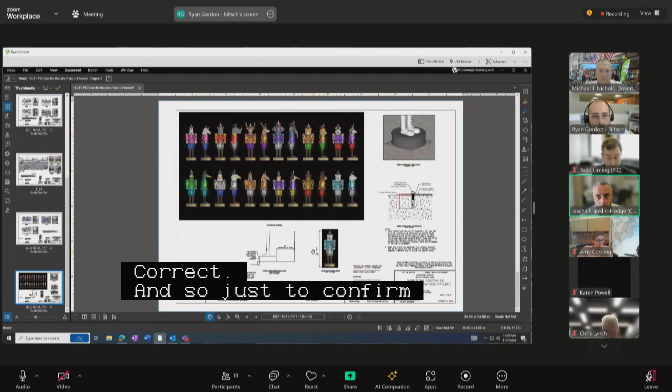Thank you very much, these are very cool to see, and very excited for 16-foot statuary downtown. Couple of questions. First, these are powered and illuminated, correct? Correct. And the power feed is coming from the city street lighting system? Correct. So just to confirm, will all of those power feeds happen underground? I will let Kelsey or Michael speak to this.

Yeah, I think in all cases, or all but perhaps the ones that are on the stage at the steps next to Millennium Tower, the other 10, it would actually emanate out of the head at the 16-foot level and reach the street light pole at that height. Got it, yeah. When your statue is that tall, you can actually just bridge to get there.

That's fair. Okay, and my understanding is that you have reviewed this plan with the City Street Lighting Division and that they have signed off on all of the details of the power arrangements, and that there is an understanding about who is responsible for wiring, for maintenance, for addressing any power supply issues that may occur while the statues are installed. Is that correct? Yes. Okay.

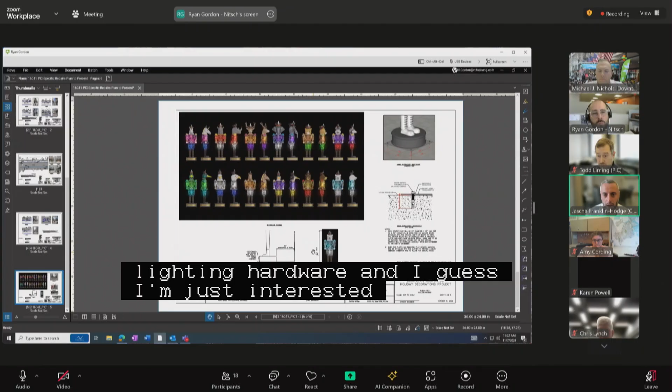Related to the street lighting aspect of this, it looks like from the details, some of these base locations are positioned over some underground infrastructure, potentially some street lighting conduit. I'm interested in hearing this group's thoughts on how we would address any maintenance issues that might arise in the future related to underground infrastructure beneath these bases, what the expectations are for how these bases can be removed or reset, and what the proponent's understanding is of who will have the responsibility for reinstallation if, for example, we need to remove a base in order to repair a conduit that's underneath.

Nitsch Engineering looked at the locations of the existing utilities in the sidewalks. We understand that utility companies, especially Boston Water and Sewer, need to maintain access to those when needed. The statues are removable because they're bolted into the ground. We didn't place any of the statues over structures, manhole covers, or anything like that - they were placed intentionally to avoid those.

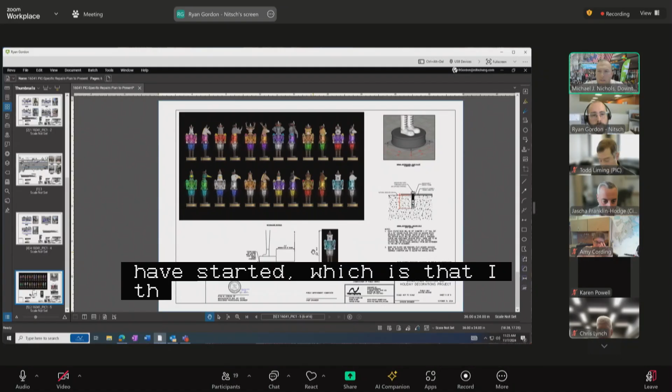The siting was selected to factor in the minimal likelihood of conflict with underground utilities. In the event there is a conflict, however, the BID would be responsible for removal and reinstallation of the sculptures as appropriate, including the bases. If a base was removed during utility construction, the responsibility for reinstalling those would be borne by the BID - entirely to be responsible by the bid. The sculptures themselves come in 3 pieces, so they are not a single fixed unit, making de-installation relatively straightforward and easy.

I appreciate that, and we can memorialize that in the LMI. The other thing I would ask is that we establish some procedures for the city to contact the BID if there's emergency utility work needed, so we have an established way to get in touch with you. We have all those protocols in place for traditional utilities, but this is something new, so we want to make sure that's close at hand.

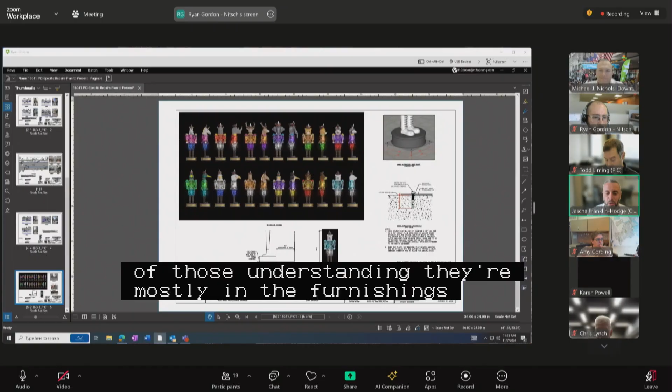My last question relates to the plates that will be permanently installed in the street and the surface treatment of those plates. The concern would be around creating slipping hazards during wet or icy conditions if there's not a sufficiently anti-slip treatment on the top surface. Understanding they're mostly in the furnishing zone - Downtown Crossing is very porous for pedestrians, and people walk through the furnishing zone regularly. Can you speak to the materials and what will be done to ensure they do not create a hazard?

Ryan may be able to speak to some of the elements, but it's our understanding that the rounded base, seen in the upper right of the image, where the feet stand, occupies the vast majority of the square footage of the metal plate underneath. So the likelihood of someone being able to step on the exposed portion is so minimal as to perhaps not be a slipping hazard. We can certainly explore treating the amount of metal that remains exposed with an appropriate slip-proof material.

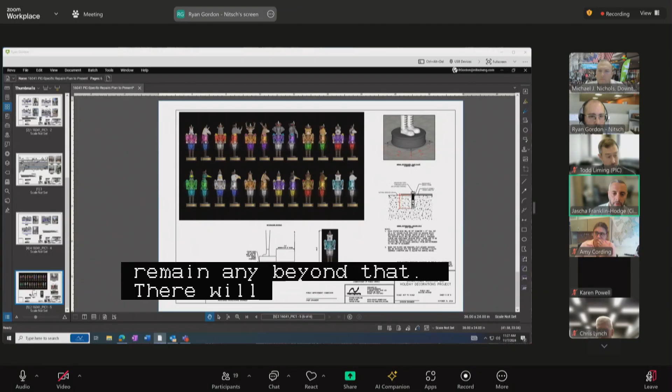Maybe I'm misunderstanding the plan, but per the detail, there's a square metal plate on which the rounded base will be installed. The concern is less about when that rounded base is installed, but whether that square metal plate is intended to remain when the statues are not installed. No - it would be removed in the other 11 months of the year. So the bolts that attach that metal plate to the sidewalk will be filled in with some kind of temporary cover flush to the sidewalk, and there will not remain any visible structure on the sidewalk when the statue is removed. Okay, got it - I think I misunderstood, I was under the impression the metal plate would remain, but that clarifies and is helpful.

It is something I would think about - we've occasionally had issues with city infrastructure where during installation or deinstallation, elements have been left in the right-of-way that proved hazardous, whereas the final condition of the plate, round base, and statue does not necessarily pose a slipping hazard. I'm not sure what the installation timeline might be, or in a circumstance where one of the statues was damaged and had to be temporarily removed, but the plate was left in place.

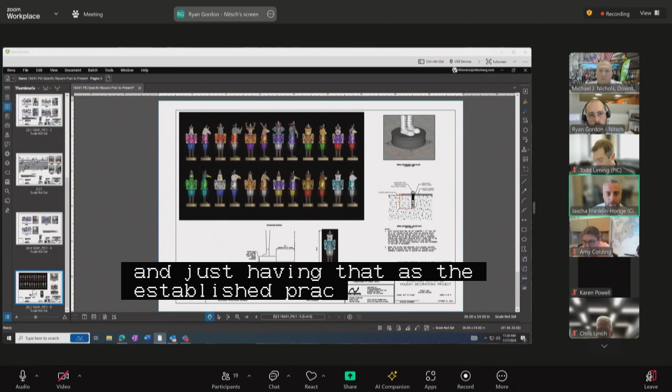So I would want to think through if there are any additional treatments or protocols we'd want to establish for how the site will be ensured safe if, for whatever reason, it's not in its fully installed condition for some period of time. That could be placing a traffic cone on it as an established practice, or some other way of making sure it's safe. We've had some issues recently with newly installed infrastructure having unfavorable conditions for pedestrians in wet weather, and I want to avoid even a temporary situation where somebody slips and falls. I don't want to prescribe a specific course of action, but would ask that for your next hearing you come with a plan you can articulate to us.

We'll commit to that, and we appreciate the prompt. Thank you. Commissioners, other questions, comments?

My computer froze up, I apologize if this was covered, but in the event there's vandalism such as graffiti, I presume you have the capability to remove it and keep the structures clean? That's right, we'll commit to that. Thank you.

We received a separate application for other winter temporary art in this location, so I think we should take a moment to make sure we're not stacking our winter art. A great problem for Downtown Crossing to have, but just making sure they're compatible.

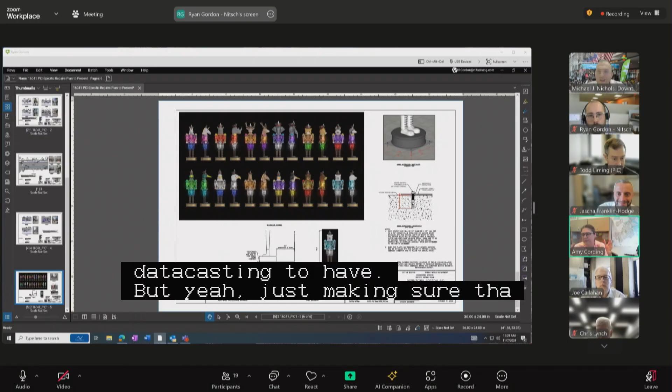Yeah, thank you, Amy, that was us as well. So as we talk about where that's going to fall, right, I just want to make sure we're well coordinated. I just wanted to flag that, so at least in terms of deinstall of these and install of subsequent winter art, that's something we would sequence to ensure there isn't direct conflict here. But we certainly commit to any aggregated review you think makes sense.

The winter art you're referring to has become a second, hopefully annual, set of installations, but the locations change each year, and we'll plan for those with an understanding that the sculptures would be coming back each year.

Commissioners, other questions, comments? PIC staff or members of the public?

I would just ask that the BID reach out to Public Works' operations team to make sure they're aware of these, and that they won't pose any issues as far as snow plowing or anything like that.

Absolutely, yeah, we had noted, to Amy's point, in the public art application, but perhaps not in this application, that the BID maintains snow removal abilities, and so if any of our infrastructure causes hardship to Public Works in that area, we would fill in the gap and be responsible for that.

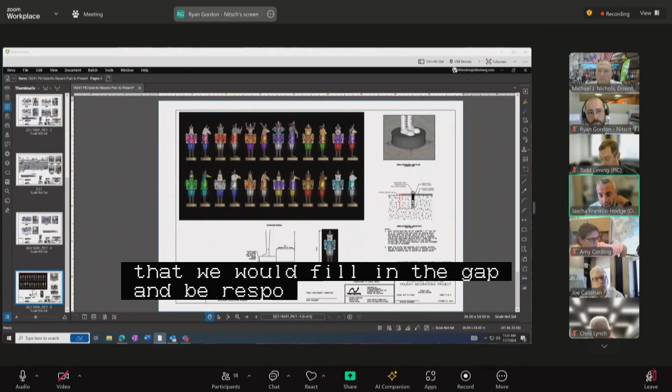So we will relay that to them. Todd, thank you. Great, I appreciate that, and Todd can provide contact information for folks.

And to Joe's point about the graffiti and other things, many issues in the public realm tend to trickle down to the Public Works operations team as a 'what do we do about this?' So just making sure they have the right contact information and protocols to kick stuff over to you as appropriate if issues land in their lap.

They will appreciate planning for that. They know how to find us on graffiti removal and other things downtown, so definitely happy to continue that conversation.

Yeah, fair enough, excellent. All right, hearing no other questions or comments, will you be ready for your public hearing in two weeks on November 21st? Ready and eager. All right, excellent, well thank you very much.